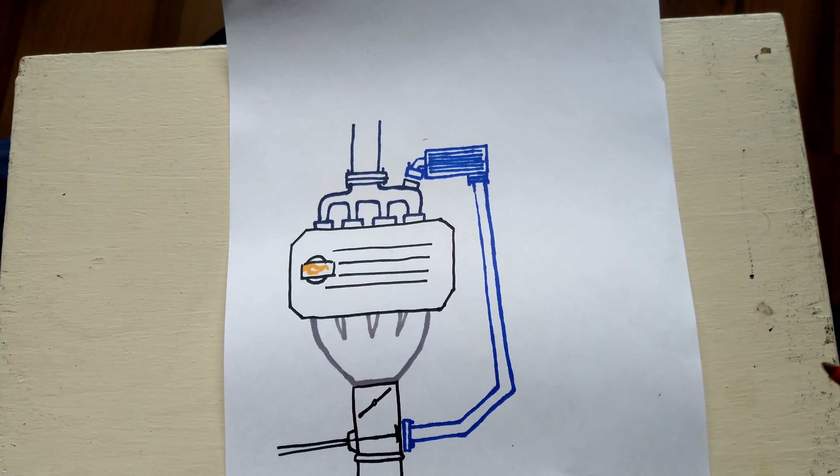So if you imagine this is your engine, the exhaust gases go out of the exhaust manifold into the heat exchanger or the EGR cooler. Once cooled, the gases then travel down this metal tube into this little vacuum activated EGR valve.

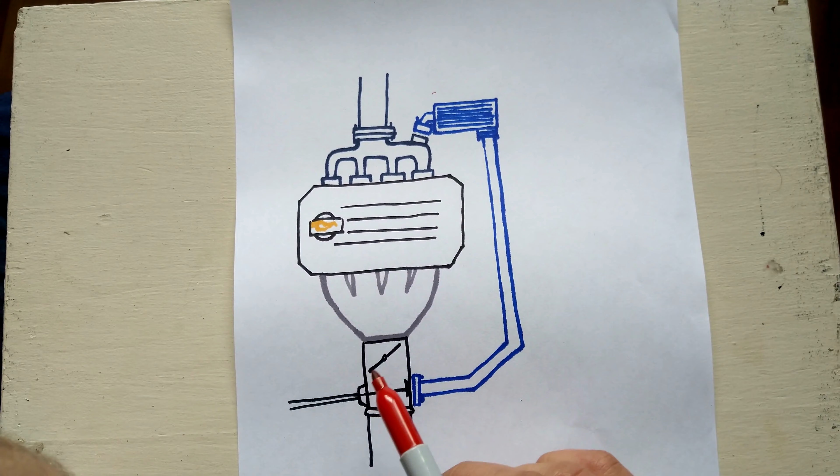This here is the ASV or the anti-shudder valve. While it stays fully open when the engine is running, it closes when you shut down the engine because it prevents any air from entering the engine and thus ensures a smooth shutdown. Now, some people choose to remove this while deleting the EGR and it's fine, but I will be keeping mine.

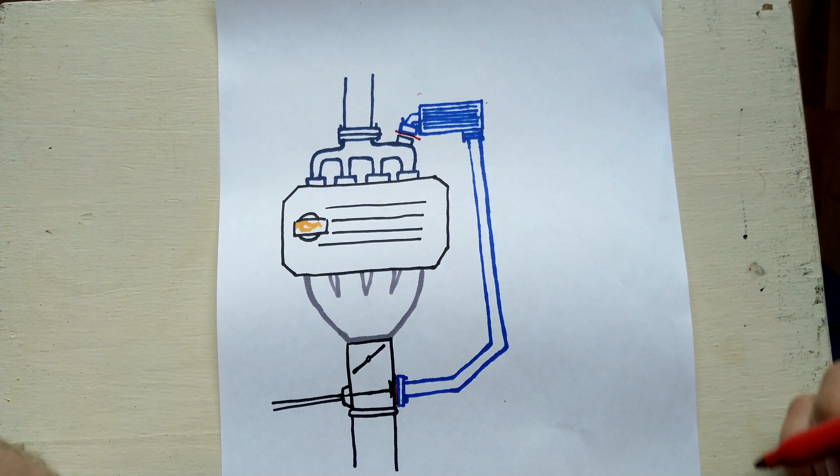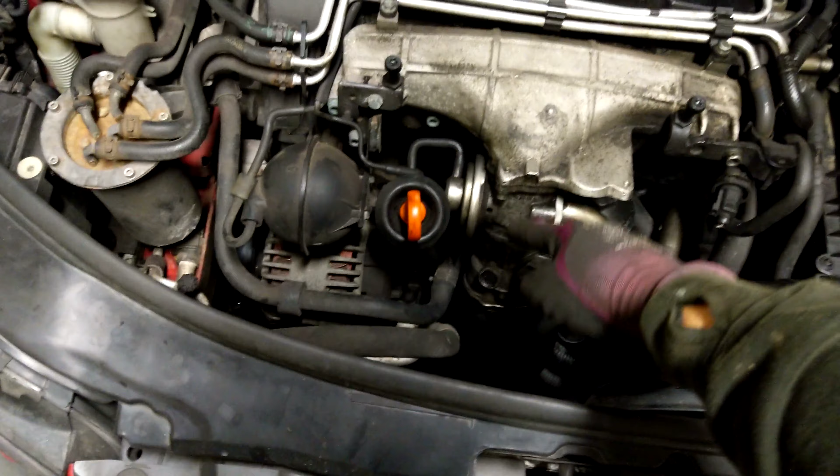Now for our two blanking plates, one is going to go right here and the other right here. So with all of that in mind, let's get started. As you can see, here's the ASV and EGR valve assembly connected via a metal tube to the EGR cooler. And to get better access, I will start by removing all of this intake piping right here.

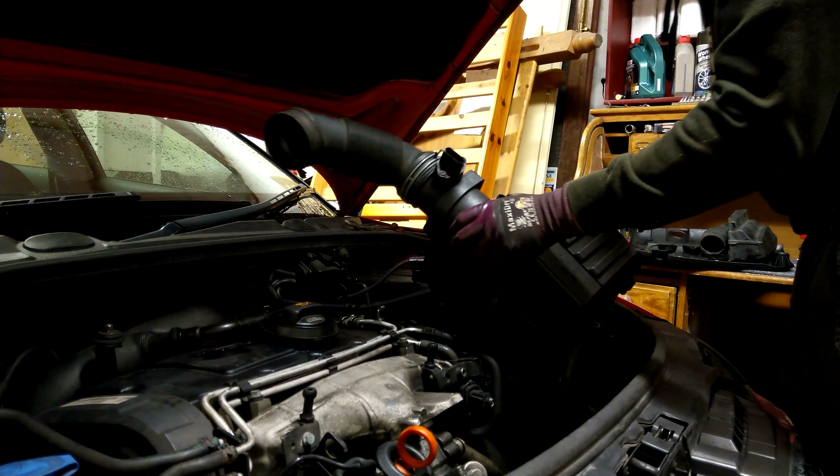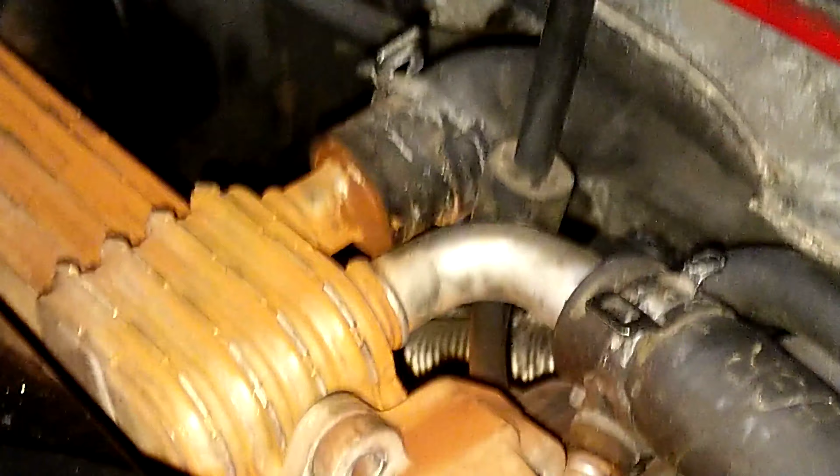You can already see the antifreeze residue left by a bad connection on the EGR cooler. To have more space for work, the battery can go as well.

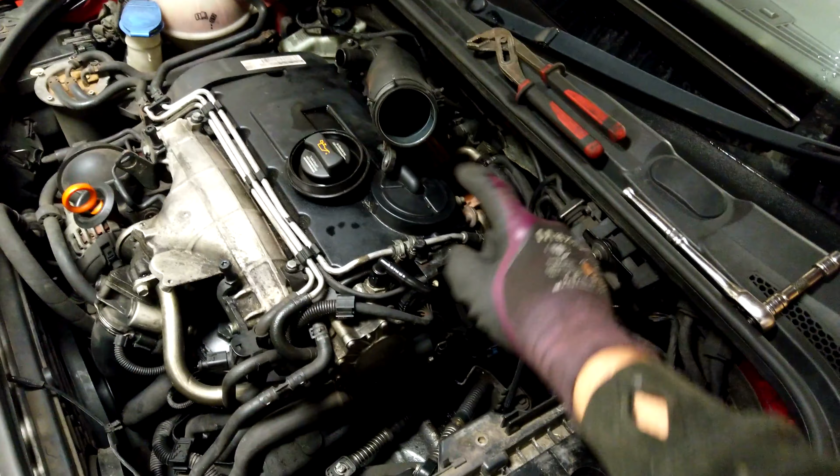Now, before we carry out any work on the coolant lines, make sure your engine has cooled down. The last thing you want is spilling boiling coolant all over your hands. Let's also open the reservoir cap just to relieve any potential pressure in the system.

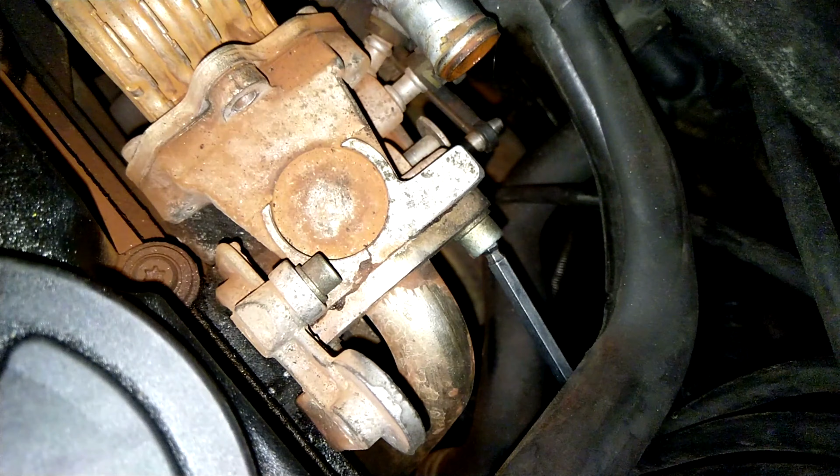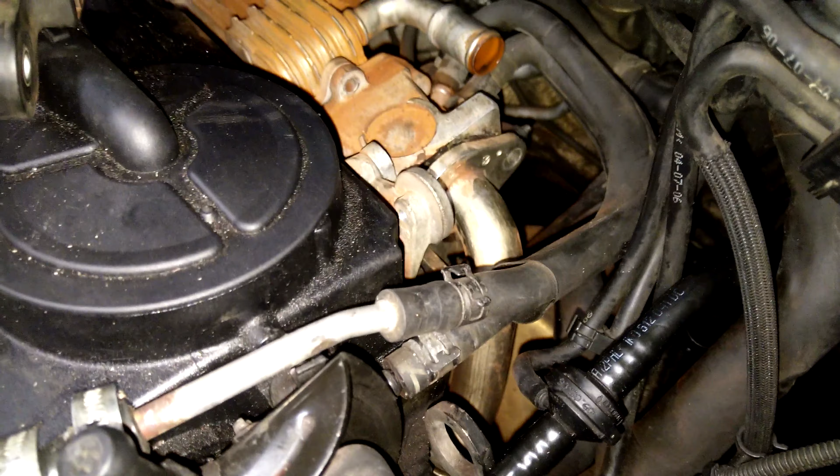Since the access to secondary lines is restricted, let's disconnect them right here. These two nuts were the last thing holding the EGR cooler in place, coupling it to the manifold.

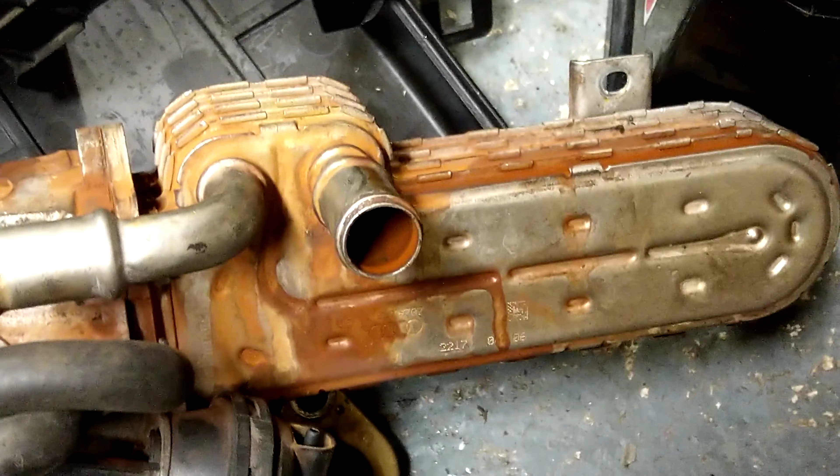You can very clearly see the effects of a leaky connection on the cooler. The same can also be seen on the catalytic converter, turbo oil feed and the vacuum lines.

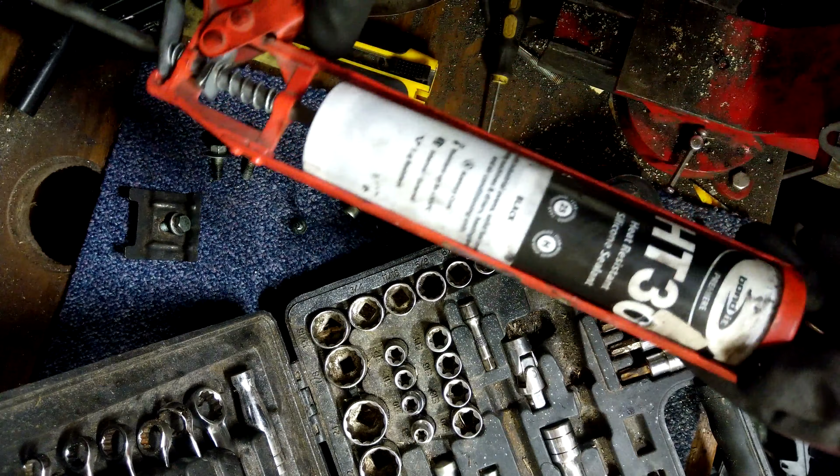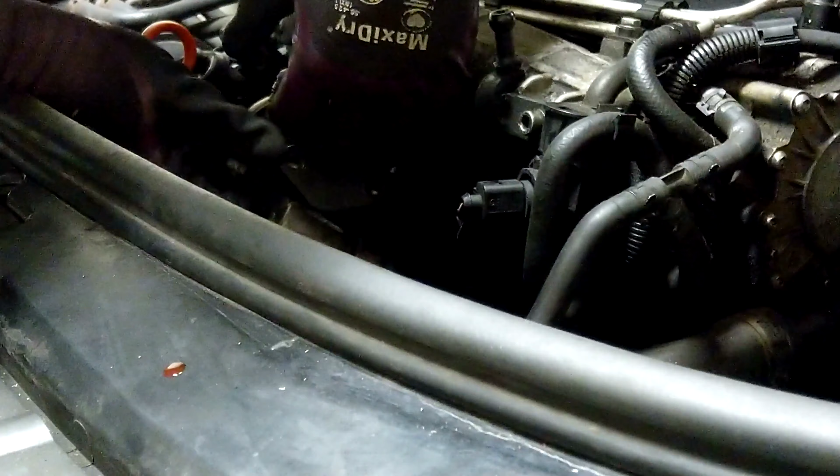Before blanking the intake, let's clean up the surface a little. Just to seal it up real good, I'm using some high temperature silicone sealant. As for the exhaust blanking plate, I'm using some exhaust paste.

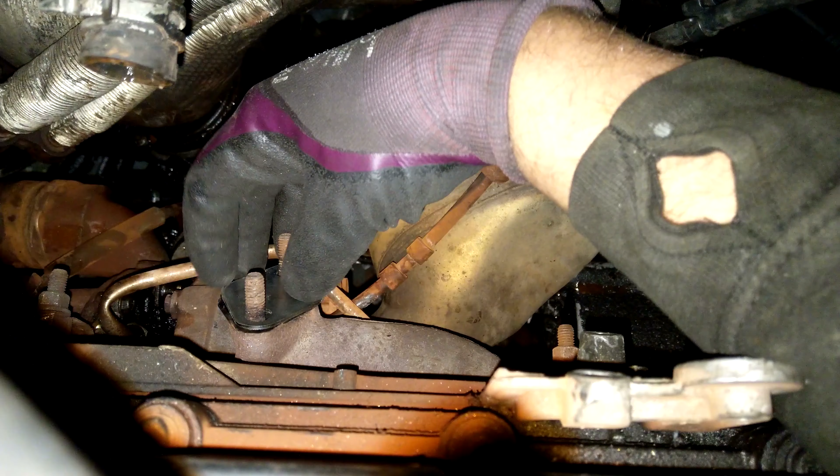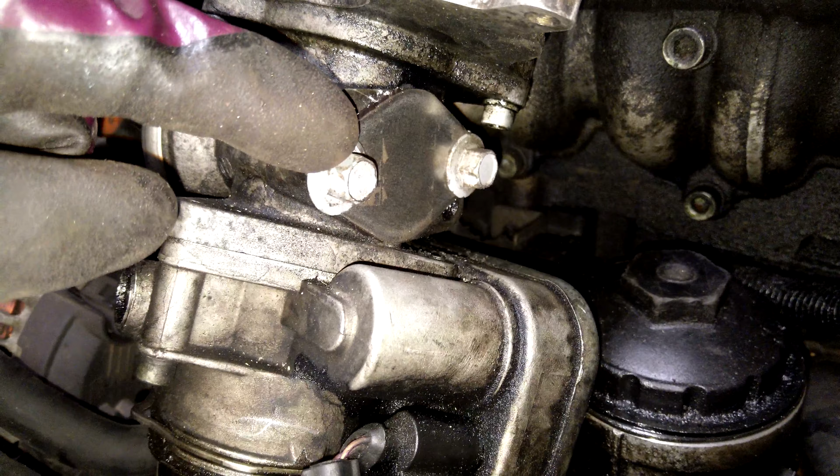With intake and exhaust plates in place, let's connect the coolant lines using this 19mm brass connector. The old spring clip wasn't in the best state, so I replaced it with a Jubilee clip instead. For our secondary coolant lines, let's salvage some rubber from the EGR cooler and connect the inlet to the outlet.

Lastly, let's block off the EGR vacuum line using a simple screw. Once that's done, let's tuck that away neatly. With all of the small things complete, we can begin the reassembly.

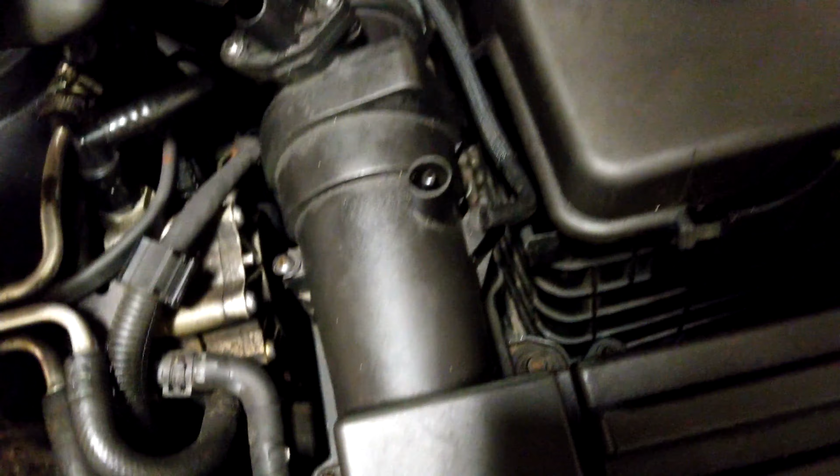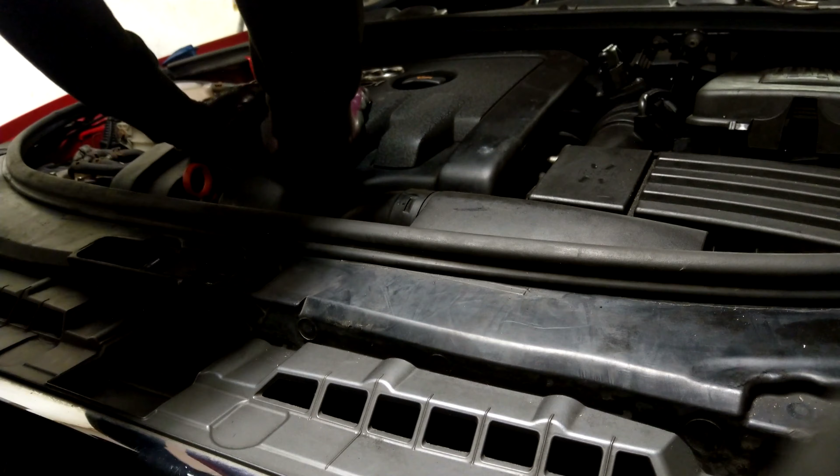Let's top up the reservoir with some fresh coolant. So now that everything under the bonnet is assembled, let's go start the engine and see if there's any leaks. And actually, let's remove the engine cover to gain a better view.

So as you can see, there's a bunch of faults on the dash, but they should clear up as soon as I start driving the car. And all the joints look good, seems to be all tight. No drips under the car either. Let's shut down the engine now.

So guys, that's going to conclude our video for today. We have successfully blanked the EGR valve and we have removed the EGR cooler. Now the next thing would be to pay a visit to your local tuning garage and have them map the EGR out of the ECU. And the first reason would be simply to get rid of the check engine light, and the second reason would be to ensure optimum engine performance.